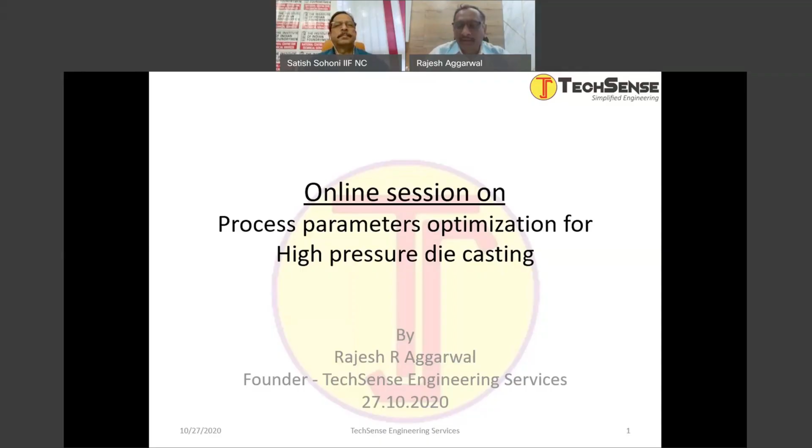We'll have a few slides, a brief introduction about TechSense Engineering Services, and then we will talk about the various parameters used during the casting process, like cavity fill time, plunger diameter, plunger speed, gate area, gate speed, venting area, and casting pressure. So today we will focus on all these variables to understand the various formulas and correlations, and understand how they behave when they go onto the shop floor for production.

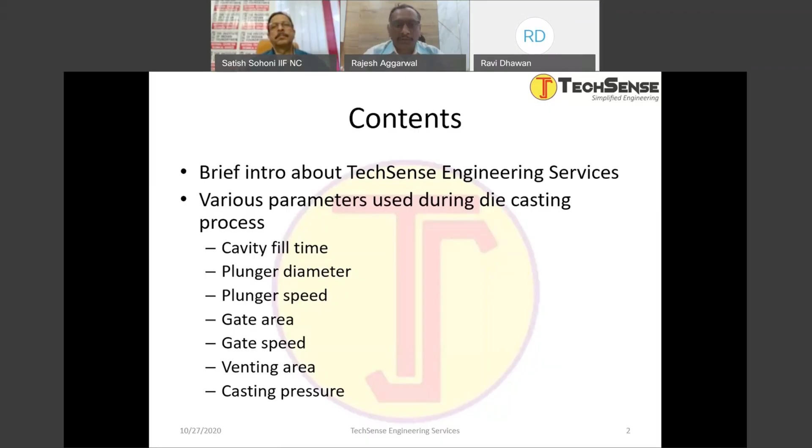TechSense Engineering Services was founded in the year 2017 with the vision to simplify the engineering for die casting process and tooling. I have a strong belief that die casting actually is a simple process, but due to varied experience from different people and different foundries, we make it more complicated. My way of thinking is, if we go with the engineering way, it is easy to understand and execute the process.

And to create experiences where passion and purpose come together to delight our customers. Our mission is to improve business productivity and profitability by value addition to TechSense as well as to all our customers.

At TechSense, we provide complete solutions for aluminum die casting, including gravity, low pressure, as well as high pressure die casting. Our services are divided into 4 segments. The first one is die casting process simulation, where we use the Magma simulation software to optimize the die casting process before the dies are actually manufactured and put into production.

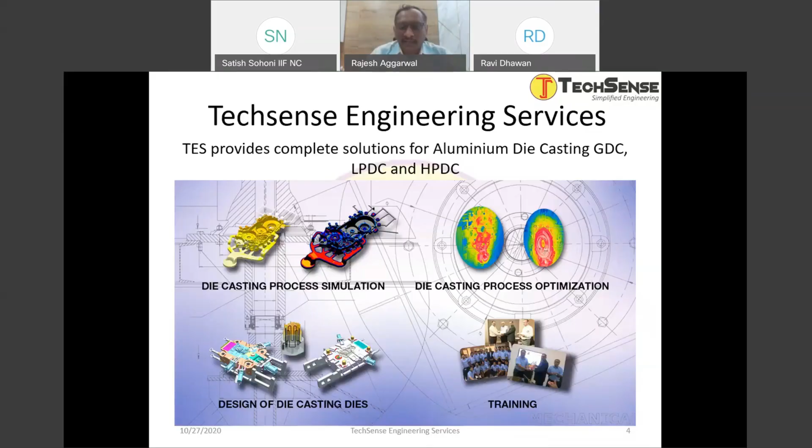In the same line, we got in touch with IIF NC, and thank you very much for organizing this session. We'll be talking about the basic fundamentals, the basic variables behind the die casting process.

In the die casting process, when liquid metal is processed, due to various operating conditions, some defects are generated, which render the part unusable. Sometimes these defects are within an acceptable range, but the defect is always there.

If you see the middle portion, that is where the casting process generates defects. So we can look at it in terms of input, process, output. The metal is the basic input; the die casting process is where the liquid metal gets solidified. Then we have the secondary process, where fettling, shot blasting, machining, painting, and other secondary processes are done on the aluminum casting part.

The defect generation we are more interested in and focused on is during the die casting process, which is like a black box because the change of state from liquid to solid is happening inside the die. We can safely assume the metal preparation or incoming metal is of good quality, because metal preparation itself is a whole subject that can lead to various problems. Our focus mainly will be on the die casting process.

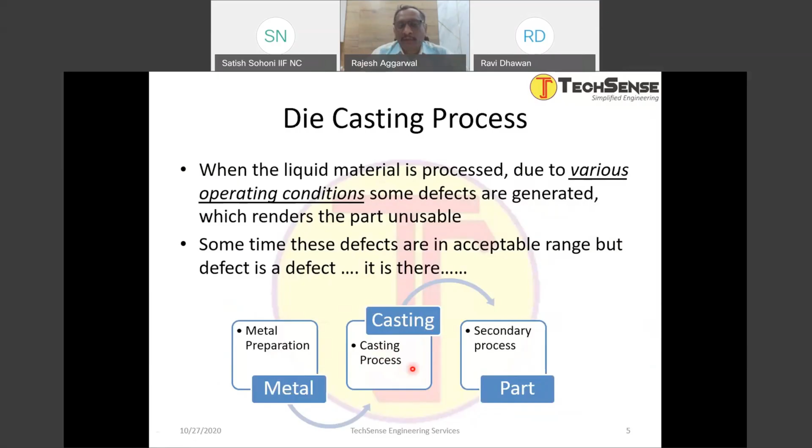If we look at the various parameters used during the die casting process, on the metal side we have the metal composition and metal temperature, which is very easy to control and easily accessible and visible to the user.

On the machine side, we have the die clamping force, the plunger diameter, the metal injection speed, and the casting pressure, along with a few more variables. On the die side, we have the cavity fill time, the gate area, and the venting area. These are some of the key variables, not the only ones, but the major variables which impact the die casting process in a big way.

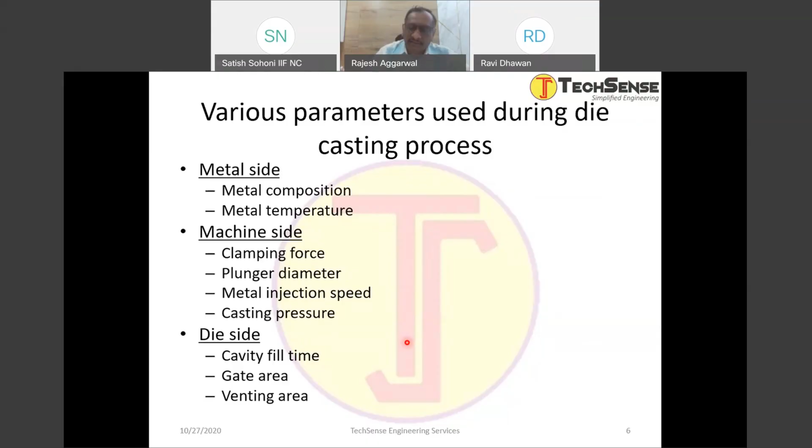So we try to understand the correlations of these various variables, how they interact with each other. Due to this process variation, various defects are generated inside the casting.

NADCA, the North American Die Casting Association based in North America, identifies 22 types of defects in die casting, like surface defects, lamination, gas porosity, blister, flow porosity, shrink porosity, heat sink, leakers, cracks, inclusion, soldering, carbon or die buildup, erosion, cavitation, outgassing, edge porosity, bending, warping, flash, excessive flux, stained casting, waves and lakes, drags, deformation, and cold flakes.

Today our focus is not on the defects. Today our focus is to understand the key variables and how they interact and behave, or what is the basic engineering behind these variables.

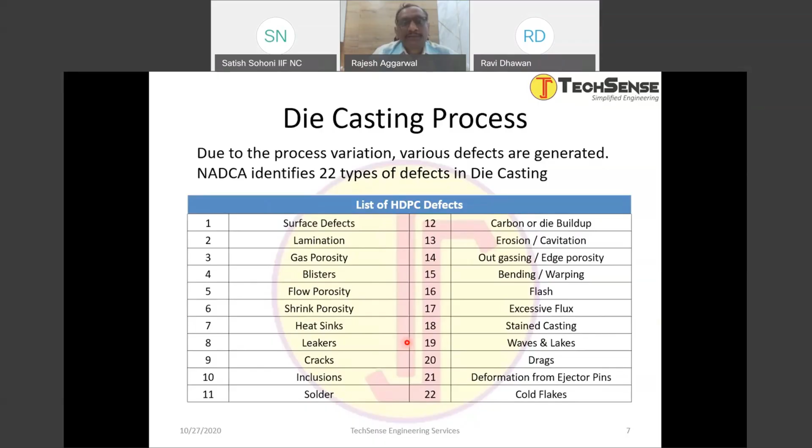So I have a basic question: when the metal flows in the cavity, what type of flow is it? Is it laminar flow or atomized flow? We're talking about high pressure die casting. Any answer, please type it in the chat box. Any answers? What type of flow is it when we produce the casting using the high pressure die casting process?

When we talk about high pressure die casting, it has to be atomized flow, and when we talk about gravity and low pressure, it is usually laminar flow. So high pressure die casting is always atomized flow, and in one of the subsequent sessions we will go into details on why we have to go for atomized flow for high pressure die casting.

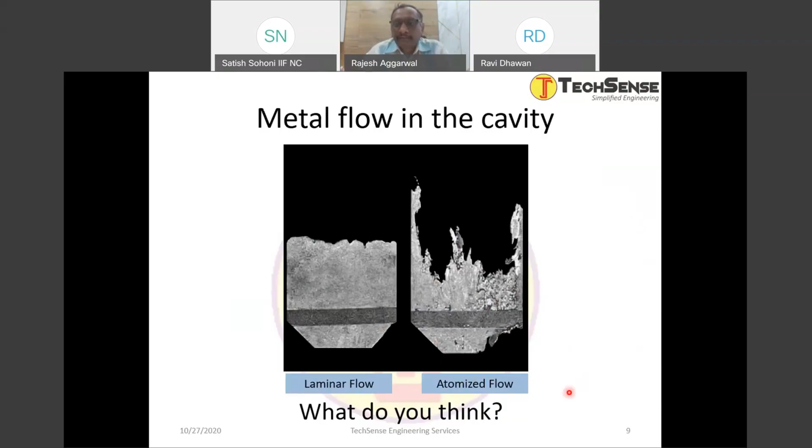As the metal leaves the holding furnace, it continuously loses heat. Whatever temperature it has in the holding furnace, once it starts coming out with the ladle, it keeps losing heat continuously. As the ladle goes near the machine, it pours the metal into the shot sleeve, then the metal flows in the shot sleeve for the first phase, and then the filling happens. The temperature drops rapidly. This is a very short time, a fraction of a second, where the filling happens.

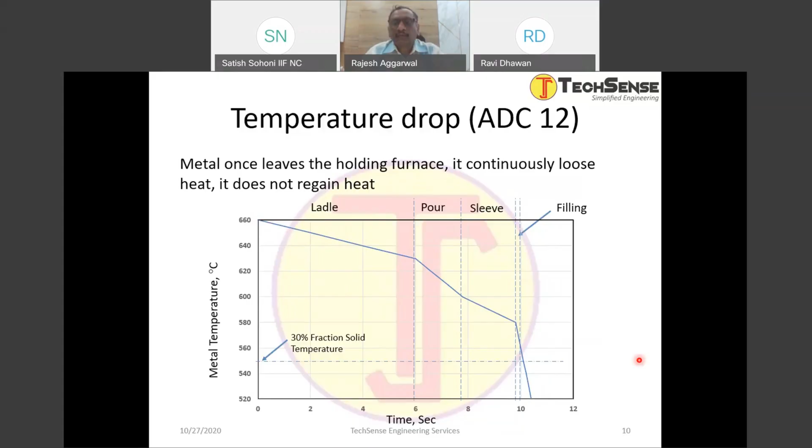Now if we look at the solidification process, heat transfer by conduction is dependent on the geometry of the medium, the thickness of the heat transferring medium, the material of the medium, and the temperature difference. The rate of heat conduction through a plane layer is proportional to the temperature difference across the layer and the heat transfer area, but inversely proportional to the thickness of the layer.

So as you can see, the rate of heat conduction is directly proportional to the area and temperature difference, and inversely proportional to the thickness. So we can understand that if the thickness is less, the rate of heat conduction will be more.

If the thickness is less, the rate of heat conduction will be more, so the rate of heat transfer will be more. If the temperature difference is more, also the rate of heat transfer is more. If the thickness is more, the rate of heat transfer will be less.

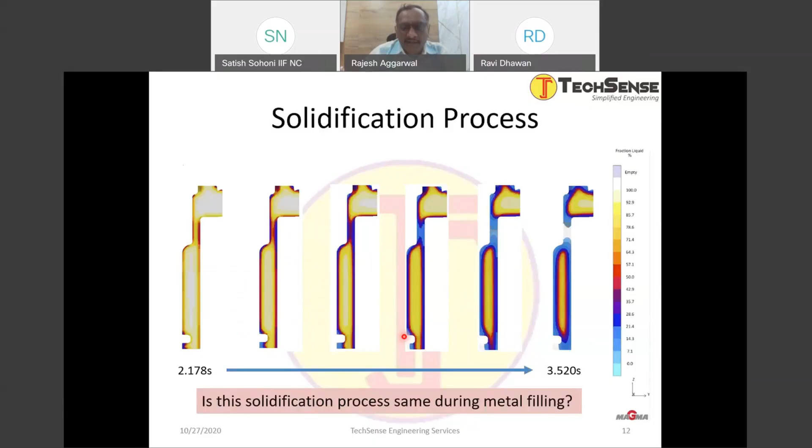As we talked about in the previous slide, during filling also the solidification behavior will be there, and metal will definitely get solidified during filling as well. So this percent solid metal fraction is a very important variable - we will go into further detail of this as well. So Z is a unit conversion factor. For aluminium, it is 4.8 to 5.9, and TH is the casting thickness.

Now, when we talk about S, the percent solid metal fraction, S is lower for best surface finish, and S is higher for lower porosity. So if you have critical castings where you need a very high surface finish, or you are doing chrome plating or painting on the castings, then it is better to have a lower value of S.

So now you can see with the formula, if S is lower, the fill time required also will be lower. If S is higher, the fill time required also will be higher. So when we talk about S being higher for lower porosity, it means we are allowing more metal to solidify by the end of the filling - that is what we're trying to say with S higher for lower porosity. So the chances of porosity will further reduce with that.

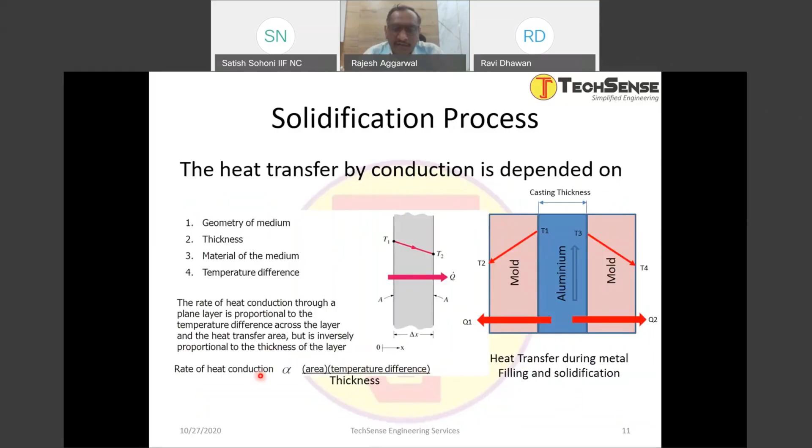Now, if you recollect, we had a formula over here for temperature difference. If the temperature difference is more, let me repeat, the rate of heat transfer, the heat conduction, will be more. Meaning, if the temperature difference is more, the rate of heat transfer will be more, so the cavity fill time required will be less. So that is the interpretation, and that is the way we have to look at it.

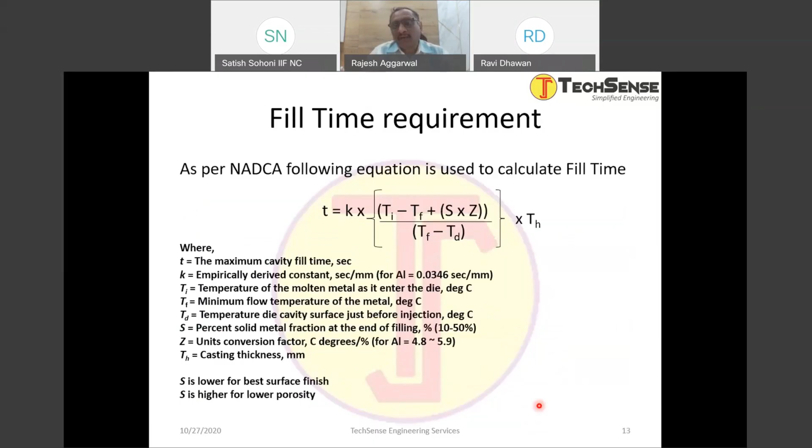Now, we can simplify this formula by using a thumb rule, where we can say the fill time required is equal to K into TH. If you go back to the formula, you can see the major variables are only the temperature and the thickness. So if we put all these variables together as a constant K, it can vary from 0.012 to 0.016 for different alloys. For the normal ADC12, it is normally 0.016. For some special structural alloys like AlSi9MnMg, or silicon type structural alloys, we normally consider 0.012, where T is the maximum cavity fill time, TH is the casting thickness, and the other variables we'll understand in the upcoming slides.

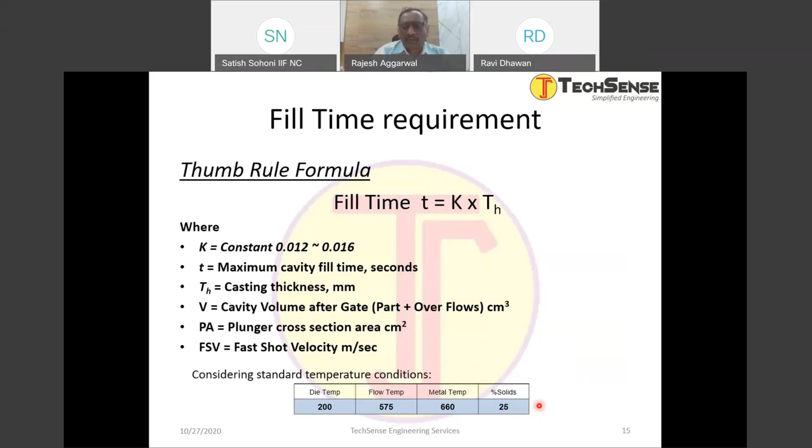Now, what we are trying to understand here is that the cavity fill time is the most critical parameter in the gating design. As I explained, it depends only on the casting thickness and temperature conditions. This also leads to a direct relation with various cold defects, which will be further elaborated in the upcoming session. Due to machine performance, flow length, temperature drops, and other considerations, usually while designing the die, we should consider 75 to 80% of the calculated fill time.

Now you will be having a question: why don't we consider the safety factor in the initial condition stage itself? That actually depends on the understanding of the die casting process. Some people are really able to manage their foundry conditions so well that they don't need this safety factor we are talking about. So we consider 75 to 80% of the calculated fill time while designing the die.

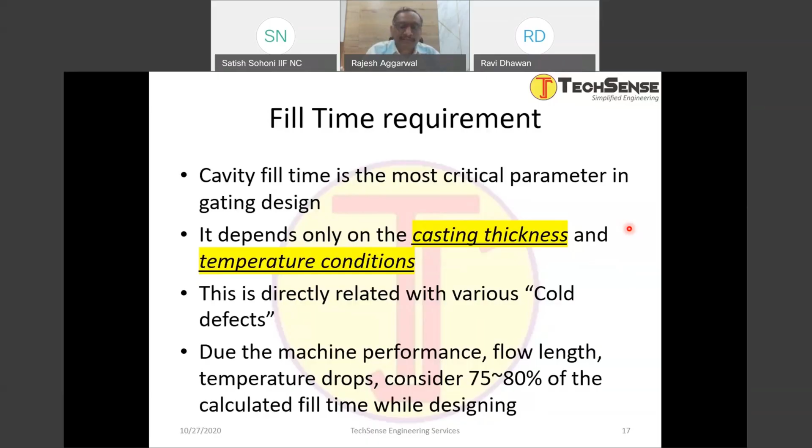Now we have the basic understanding of what the cavity fill time is. Now we try to understand how the cavity is being filled up.

As you remember, so far we have talked about the fill time.

Are you not able to hear me, Mr. Sohoni? There was a message that someone is not able to hear. Is it only Mr. Sushant Bhuyan or is everybody not able to hear me? Mr. Sohoni, are you there? Yes, sir, I'm available, sir. Even if he's not available, yeah. No, I'm there. Some people, one person has messaged that he is not able to hear. So it must be his audio problem. I'm from Calcutta, the audio is okay. Okay, fine, thank you, let's continue.

So, as you continue to remember, so far we have discussed about the fill time requirement without having any volume. We talked only about the casting thickness, right?

Now, when we talk about the die casting process, it is not only the fill time, we have to fill up a certain volume. So it is the component for which we are designing the die, the volume of that component, right?

So now we are trying to convert here in this slide what you are seeing, we are trying to convert that fill time to the flow rate, right? Now with the basic understanding of the fill time, rest of the calculations will all be based on the flow rate. So what is the flow rate? The basic definition of the flow rate is a flow of unit volume per unit of time. So what is the volume over here is the cavity volume.

And if we talk about the die casting process, all our calculations and understanding basically start from the gate, right? So the volume after the gate. The cavity volume what I have mentioned over here is basically the cavity volume after the gate, meaning it will include any overflows, chill vent, riser, or whatever I have provided after the gate. So that is the cavity volume.

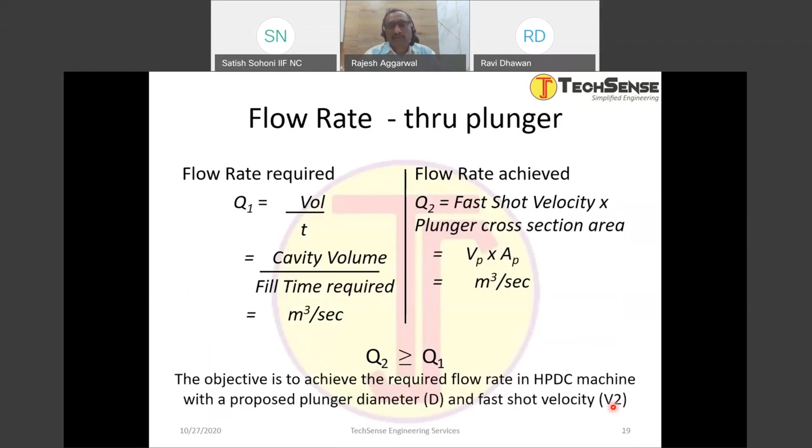Now, we can put up this basic formula, whatever I had mentioned so far, Q1, Q2, we can simply put this in the Excel sheet.

Remember we have considered the casting thickness, so we can calculate the fill time required. Then we have the different weights, and the weight after the gate. That will be the sum of casting weight plus overflow and chill vent weight. That is the weight after gate.

There we have a variable, the liquid metal density, converting these grams into volume. Then we have the volume after the gate and the metal flow rate required, that is Q1. As you can see in the Excel sheet, I have maintained the flow rate as centimeter cube per second, and accordingly all the units are defined. By missing the units, it's very, very difficult to manage.

Now, when we go to the second part, the formula, you can see the shot sleeve plunger diameter. The plunger area, that is pi d square by 4. Plunger fast shot speed, right?

Here you can see the green color cells or the blue color cells are the inputs. The plunger diameter is the input. The plunger fast shot speed is also given as an input. And then we achieve a certain flow rate and we achieve a certain fill time.

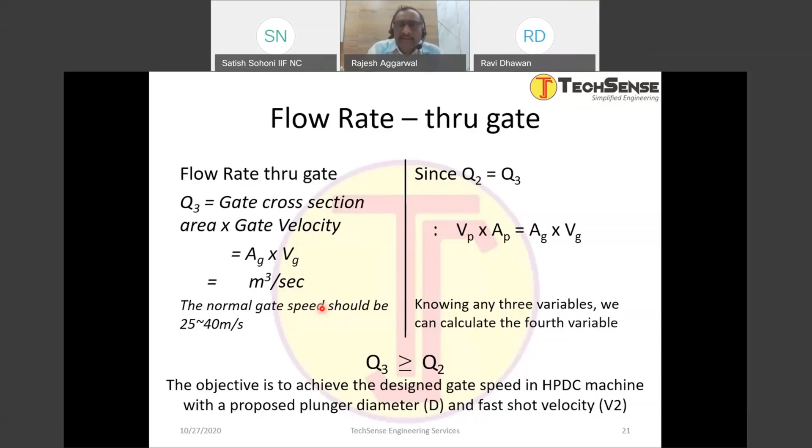We can further see the same thing again in the Excel sheet. Q2 we already had; now we are calculating Q3. So we are giving gate area as an input, or metal speed at the gate as an output. Flow rate at the gate is also an output. Q3 has to be more than or equal to Q2. Okay, then proceed.

Now, you might be wondering why we are taking gate area as an input and the gate speed as an output. As I mentioned in the previous slide, you can take any variable as an input and change the formula accordingly. It is not necessary that you take the gate area only as an input or plunger speed as an input. You can decide—there is no limitation. But the basic formula remains the same, what we are doing over here. So based on this formula only, we are calculating these values.

Now the fourth area is the ventilation.

Let me go back to the previous slide. We're talking about the casting process. When the metal is coming into the cavity, what is inside the cavity before the metal comes in? The cavity is filled with air. So whatever flow rate the metal is coming in at, the air also should be removed from the cavity at a similar flow rate.

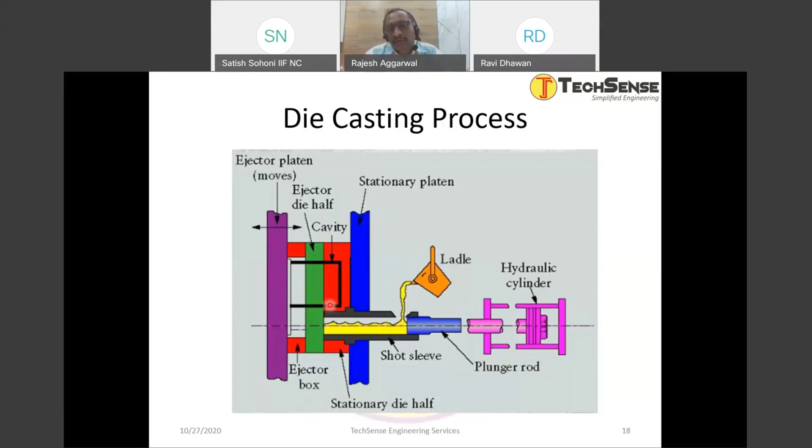I hope you are able to get this. Whatever flow rate is used to feed the metal into the cavity, the same flow rate should be used to remove the air from the cavity. Based on this understanding, we are calculating the venting area.

What is the flow rate through the air vents? The vent area into the air speed. Here we are assuming the air speed in the range of 85 to 110 meters per second. The maximum air speed can be 210 meters per second. Beyond that, air will not be traveling normally - it will be like ultrasonic or a different range. So it will not be the normal air speed. We can calculate the venting area with this equation.

Now we have one more variable added, that is the venting area. The objective of this equation is to achieve the designed venting area in the high pressure die casting machine with the proposed plunger diameter and the fast shot velocity. With the given Q2, I can calculate the venting area. Q4 should be more than or equal to Q2.

It is very, very important to make sure that whatever air is inside the cavity should be removed with an equal or higher flow rate. When we talk about using vacuum in the die, what we are doing is removing the air from the cavity at a much higher speed. That is where venting becomes very, very crucial and critical.

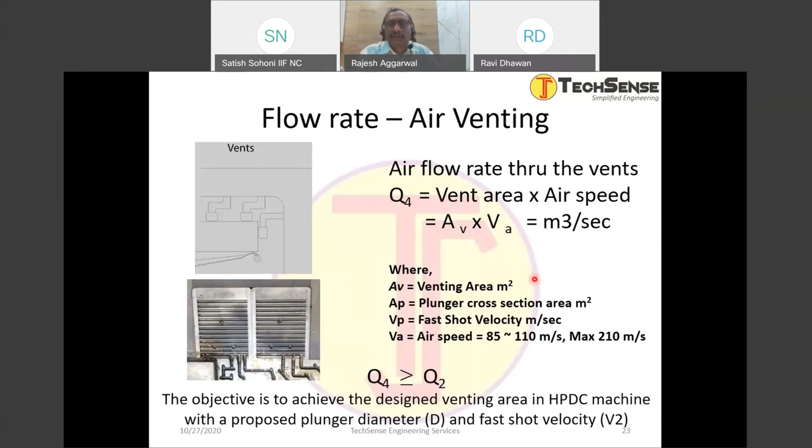If the venting is not enough, you can assume the formula - the Q2 is fixed from the plunger speed and the plunger cross-section area. If the venting is not enough, what will happen? The VA will increase, meaning the speed of the air passing through the vents will increase. And if it crosses 210 meters per second, it will eat away the die, it will erode the die. So there are multiple issues, or the air may not go out at all - it will get stuck or entrapped inside the cavity. That is the importance of venting.

We can again correlate this with the same Excel sheet. We can put in these values - giving the speed of the air through vents as an input, the ventilation area required as an output. Now there is one more thing we had put up: gas ventilation area, how much we have actually provided in the die. It is just an indication to understand - if you are providing 100%, your flow rate will be good. If you are not providing 100%, you can still achieve the same flow rate, but you may have to increase the speed of the air through the vents. Are you getting how it behaves?

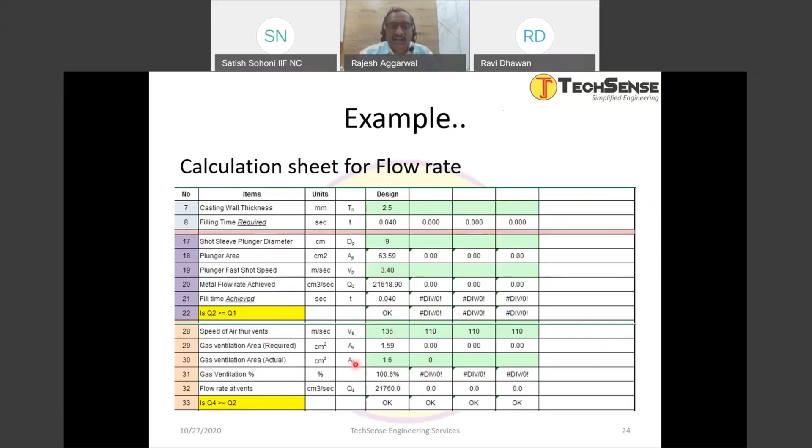So these are the simple formulas put up in the Excel sheet, and you can have a very good understanding of these variables. You can play around with this Excel sheet very easily by changing the different values and variables, and see what is happening and how it is behaving.

Now there is one more important variable, that is the casting pressure. So what is the casting pressure? You have an injection cylinder on the right side, and the plunger tip on the left side. The forces on both sides of the piston must be balanced, isn't it?

So what we are saying is PH·AH should be equal to PS·AP. What is PH? PH is the hydraulic system pressure - that is the hydraulic pressure at the injection cylinder, and AH is the effective cross-section area of the hydraulic piston. What is effective area? It is pi by 4 times (dH squared minus dR squared), where dr is basically the tail rod. This is simple mathematics - we calculate the effective cross-section area as the cylinder piston diameter squared minus tail rod diameter squared, times pi, divided by 4, that is AH. And the hydraulic system pressure is the nominal pressure applied during phase 3, the intensification phase.

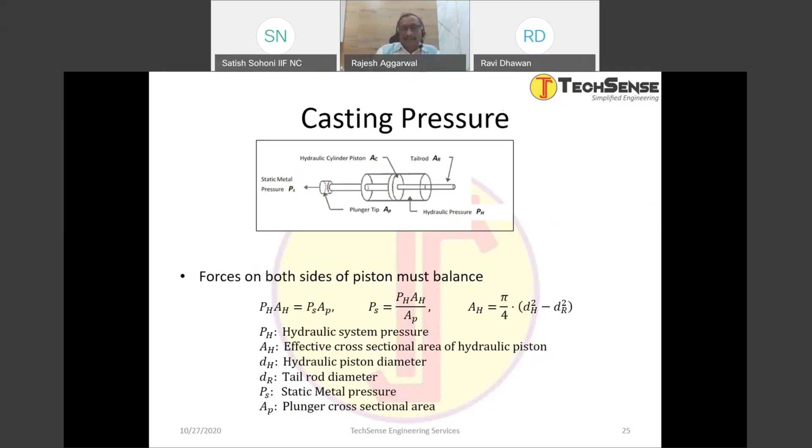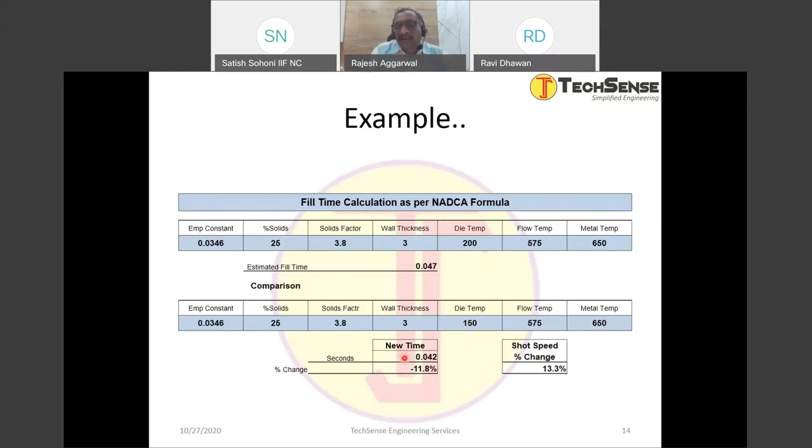And if I increase the speed, I achieve a reduced fill time. What are we trying to do? With the reduced fill time, we are trying to compensate some of the variable, either here or here or here, anywhere. We are trying to compensate for some of the non-standard variable or the non-standard input. Non-standard input means, as we say, die temperature required is 200, but it is not 200. Then you have to compensate somewhere. How do you compensate? Increase the speed, reduce the fill time required, achieve a lower fill time. That is how you do it. That is what I meant when I said we will see that in the later stage. That is what happens on the shop floor.

Now, the second variable: increase the pressure. Now the cavity is filled, but you increase the pressure to pack the material, to push it more harder - increase the pressure. So these are the most basic variables which are getting optimized or changed during the production process.

Now, if you have gone through carefully the previous slides, if I am increasing the speed, V2, what will happen to this slide? What are we doing here? We are comparing Q4 with Q2. If I'm increasing the plunger speed, that is the phase 2 speed, my flow rate will increase - meaning Q2 will increase. Since Q2 is increasing and it is more than Q1, that is always okay, no issue. But as the Q2 increases, your Q4 also needs to increase.

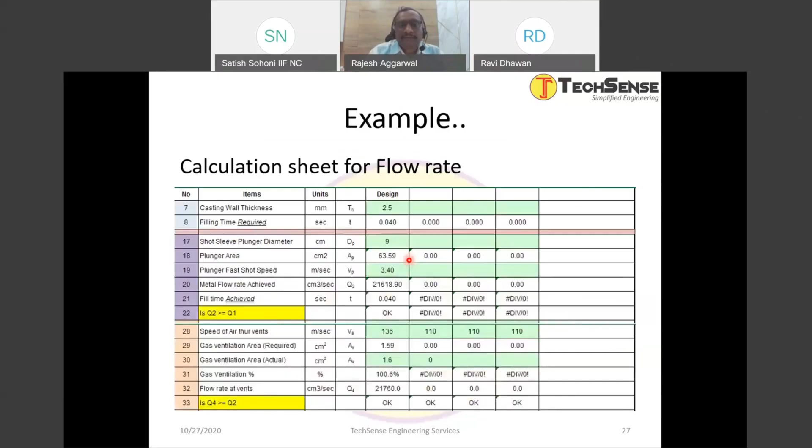Now let us try to understand one more thing, where we had compared Q2 and Q3, right? That is just to understand the correlation, what is happening. If I am increasing the speed, as we just discussed, we are increasing the Q2, right? Since Q2 is more than Q1, no issue. But what happened over here? Q3 versus Q2, you need Q3 also more than Q2. But since the die is already made, it is hanging on the machine, right? The gate area is fixed, right?

To achieve that flow rate, or to make that same flow rate pass through the gate, what will happen? The speed of the gate will increase. Are you able to grab this point? How are these correlated? We said we have only increased the plunger speed, so why should the gate speed increase? But there is a direct correlation. Because the gate area is not changing when the die is on the machine, it is only increasing the gate speed, because whatever flow rate you have achieved, the same flow rate will pass through the gate, right? So that is another very important correlation to understand what is happening over there.

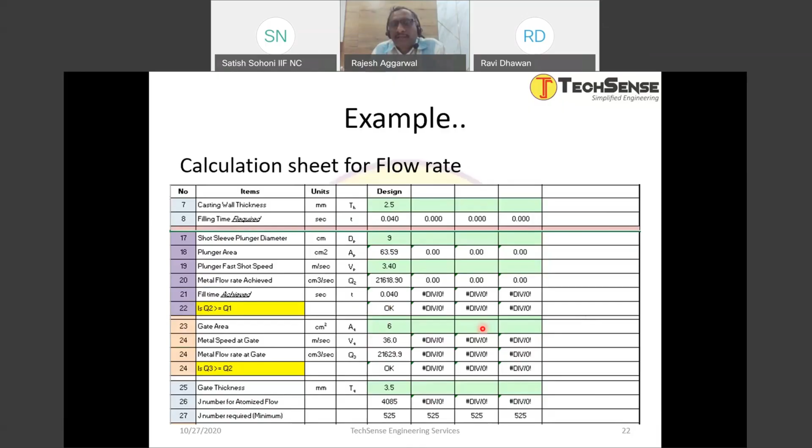What happens to the gate speed, right? So any increase in the plunger speed directly affects the gate speed. But if these things are taken care of during the initial design of the die casting die or the process design, then a lot of issues can be resolved beforehand. The number of trials or the iterations can be reduced on the machine, right? So that is the basic understanding what we are trying to develop.

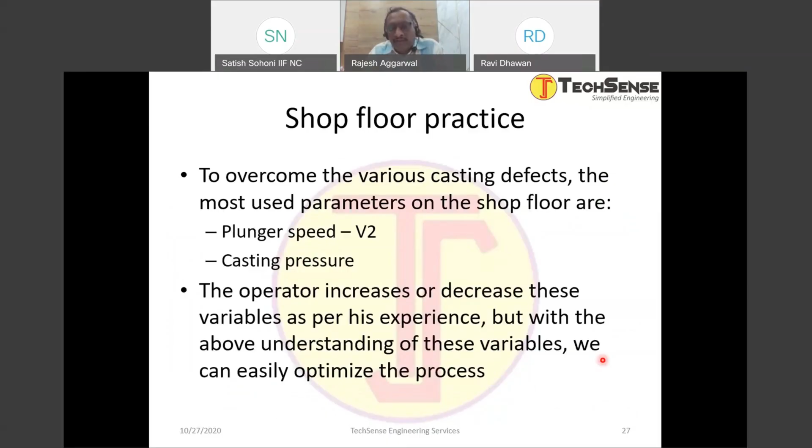And I hope you are able to get some insights into the basic engineering for the die casting variables, which are also part of the design variables. Right? Now, again, the important point, which I usually share during all my sessions, the integration of the product design, tool making, and the die casting as one team is very, very crucial to the success in die casting. If you miss out any of these variables, it will lead to failure.

Right? The product designer has made the product design with some intent, and if it is not known to the tool designer, he will miss out something, and whatever you do, the casting will fail. Right? The tool designer has made something with some intention, and if it is not fulfilled by the tool maker, again the casting will fail. Whatever you do here as a designer, as a tool maker, if it is not executed properly in the foundry, it is again a failure. So that's why integration is the key.